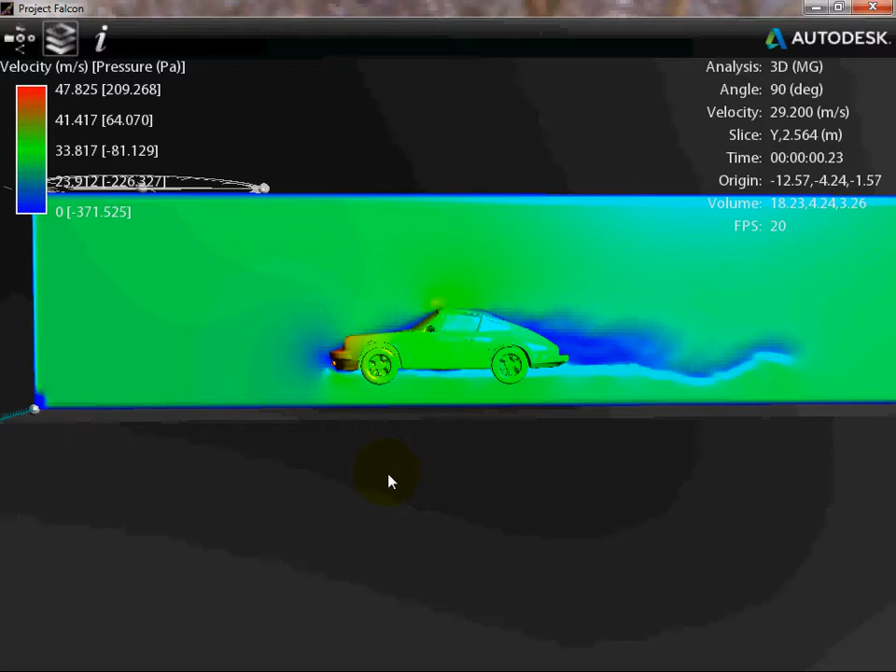And it's fairly simple to use, and you can import models quite simply and quite easily without too much dramas, and use them for wind testing or heat testing, flow analysis. But in our particular case, we're more interested in wind testing. Now what you see here is what the front screen will look like when you open up, and there's a model already placed in the screen, which is a Porsche, an older style Porsche.

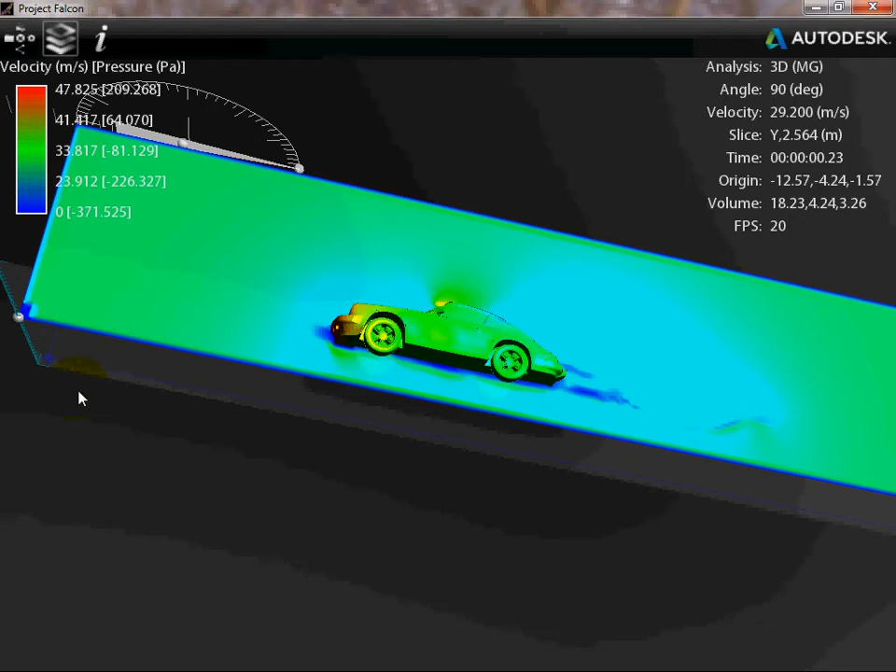Now I've just pressed my left mouse button, I'm holding it down, and I'm moving the viewing plane, as you can see, just by holding my left mouse button cursor. Very similar to what you would do in Creo Parametric, and you can move it to where you want to see. Now you notice there that there's a plane splitting down the center of the car. That plane can be moved and adjusted. It's actually the plane which shows the flow of wind in a two-dimensional sort of a setting over the vehicle.

And you notice how there's colors from red down to dark blue. Up on the top left hand side here, the indications are what that means. You're given two figures up here. The one on the left hand side is the velocity in meters per second, and on the right hand side you're given pressure in pascals. And so you can see the red indicates usually the higher velocity, and the higher pressure go hand in hand. Blue is zero, and in fact the pressure is negative at the zero end.

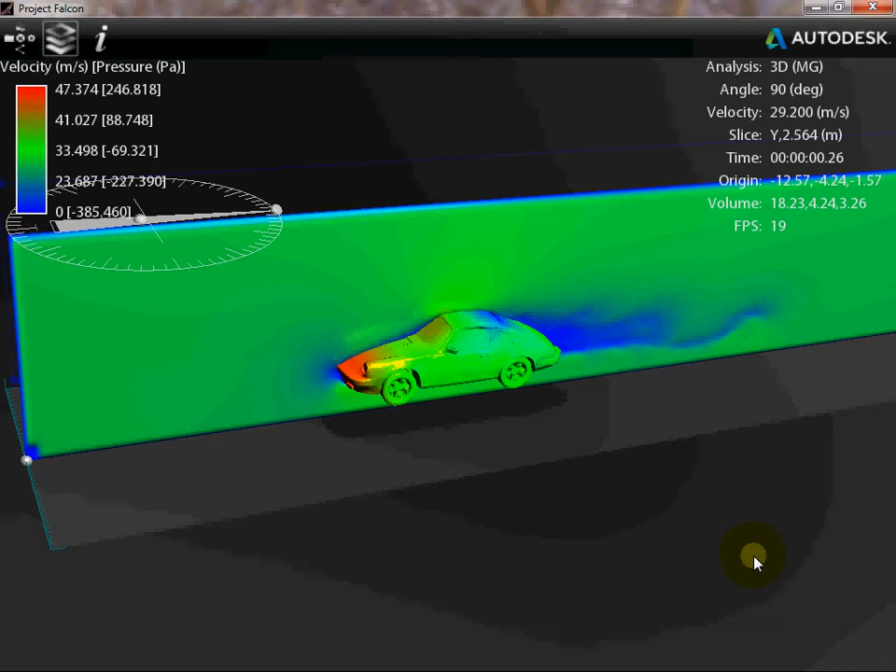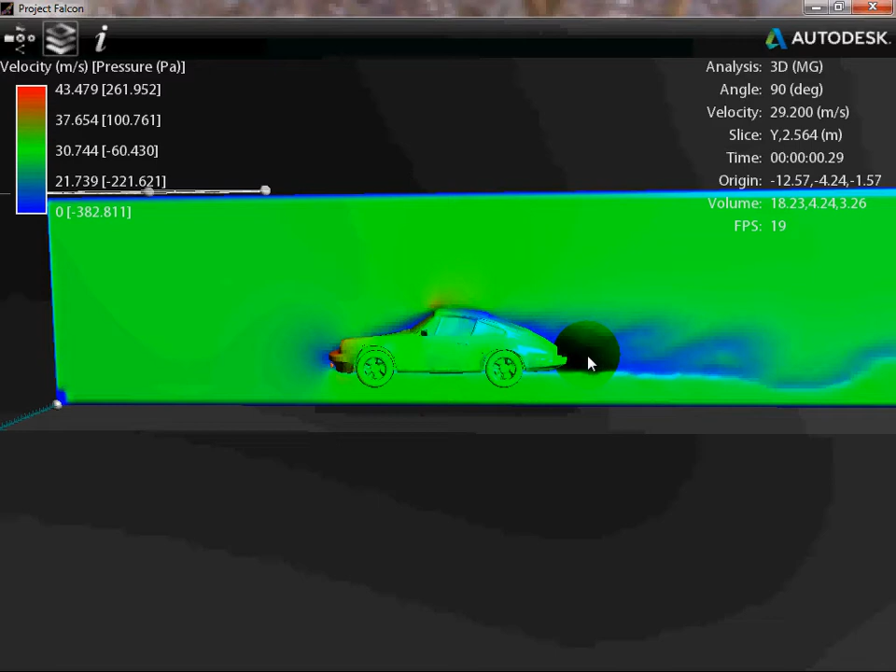Now when we're designing cars, we want to minimize low pressure zones, because those low pressure zones will actually create a vacuum which will suck the car in the opposite direction of the flow. So as a car travels quickly, it'll generate a high pressure resistance to motion at the front, which you'd expect, the wind pressure pushing against the car.

And as it travels quickly, around the back over here, it'll also develop a vacuum which will tend to want to suck the car back into that vacuum place. So it also experiences a drag, it's called, as a result of a low pressure zone which is situated opposite to the direction of motion.

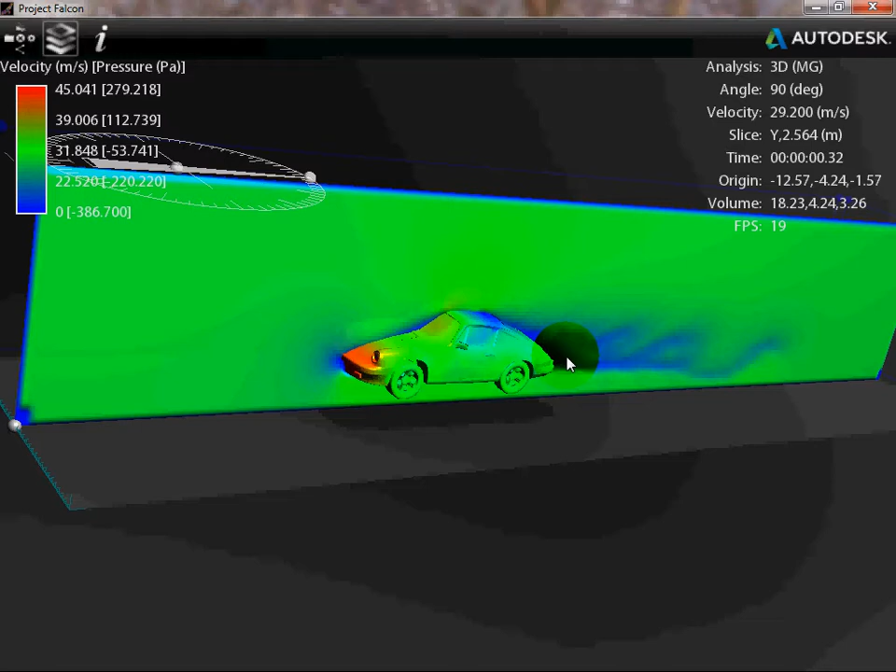Okay, now more about Project Falcon. At the top here you notice there's like a compass sort of a setting. That compass allows you to adjust the wind direction. You can adjust it by clicking on this little arrow and moving it around, so that will give you a different wind direction flow. And you'll see each time you change that, if you've got a slower computer like mine with an i5 processor, you might have to wait a little while.

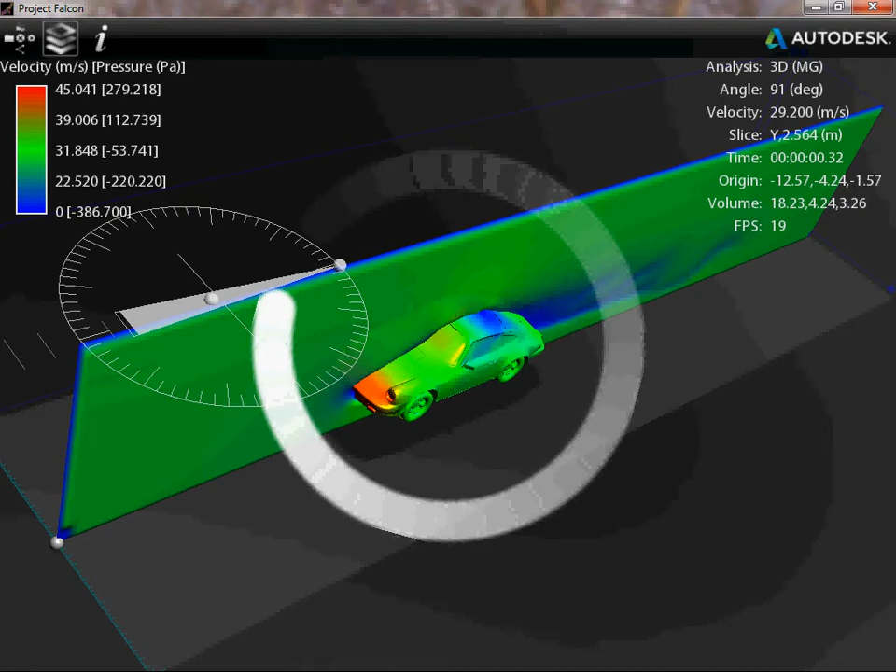So I might pause every now and again so we don't have to watch this while Project Falcon reconfigures itself. So I'll pause here and come back. So it seems like a simple movement. We move the airflow slightly, but you see solving airflow is written down here. Falcon's got to do a lot of recalculating to work out the different patterns of resistance involved in moving the airflow even slightly on the car. Okay, it's completed that now.

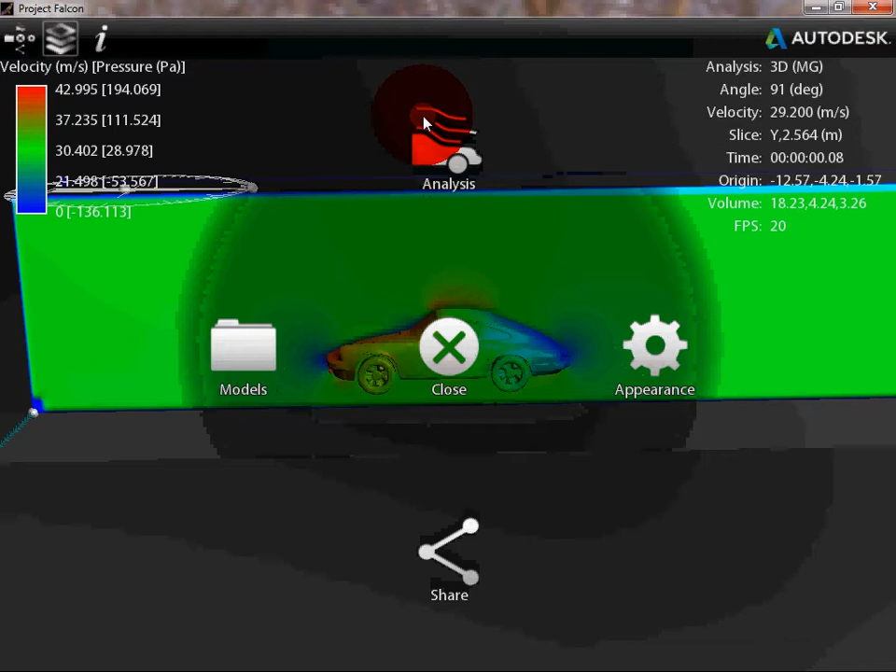Next thing to show you is probably something which is very important for us who want to test our own models, is how to bring in our own model, rather than use one of Project Falcon's. Now, if I hold left click down anywhere on the screen for a couple of seconds, I get this menu circle.

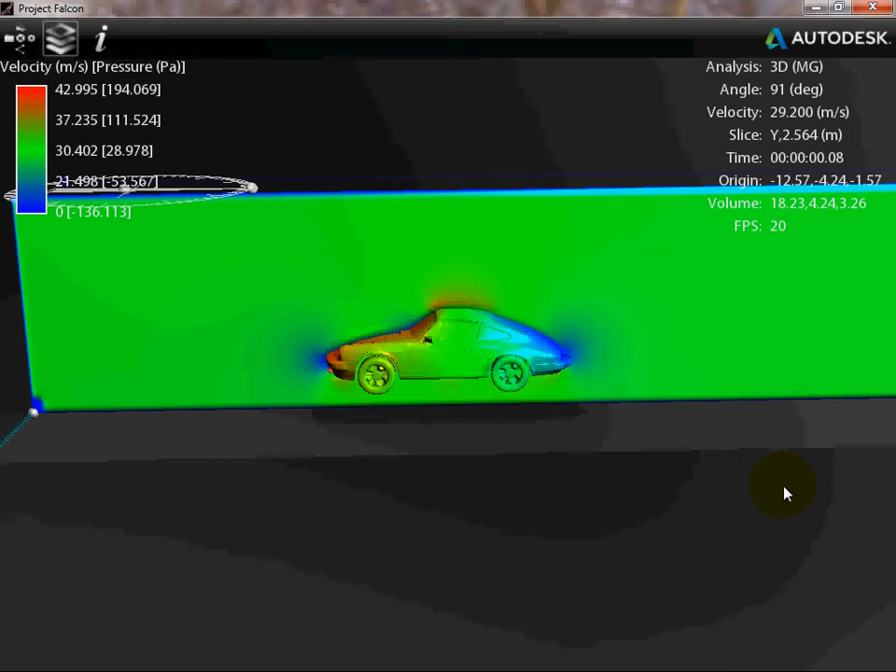And from here, we can go to whatever we want to do. We can change the appearance of the model, and we can change the way it displays airflow. We can change how it shows its results. We'll look at those in a minute, but more importantly, if I hold my left cursor down again, I'm interested in models, and I want to bring in my own model.

I can use some samples that are here. I don't know how to cache models, but let's import a model, which is what I want to do. Now this has gone to where I've been before, onto my desktop, and I have my own model that I want to bring in.

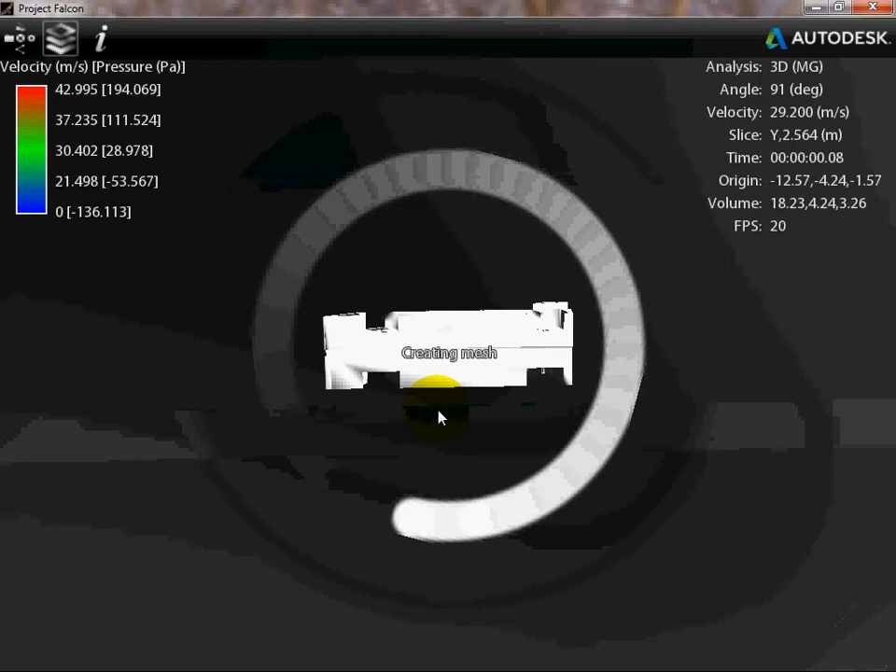So let's try this model over here. Click on it, open it up, and Project Falcon has now brought and imported this model, which came out of Creo Parametric, and it's now going to create a mesh around it, which is a sort of a breaking up of the smooth edges into finite smaller shapes that it can then calculate with.

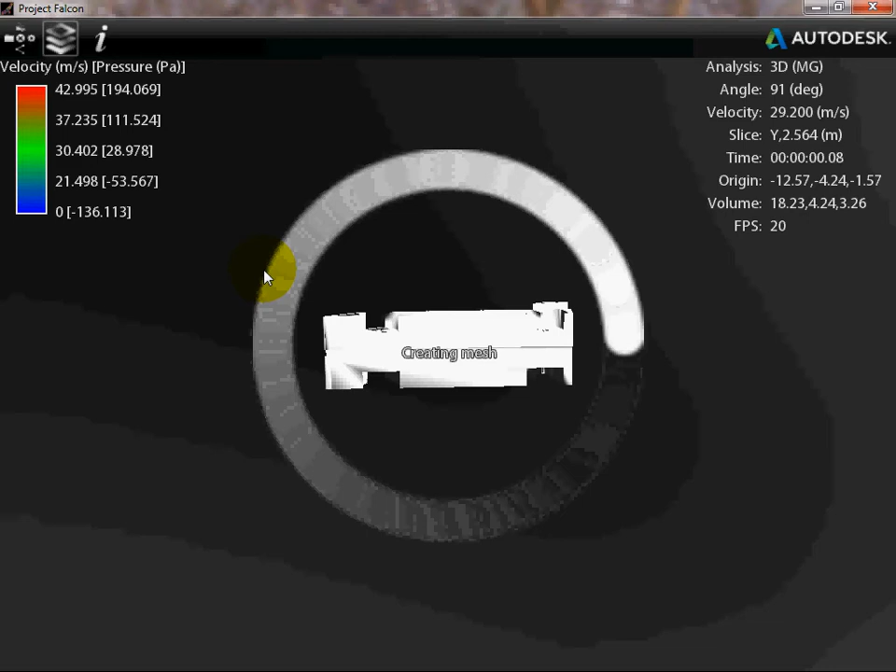So it's almost like putting a fishnet stocking around it: the smooth surfaces are divided up into scales that can be geometric shapes, plane geometry shapes that Falcon can work with. Alright, I'll pause a bit more so we don't have to watch this.

Okay, well there it is. It's taken probably about a minute or so, and our model is now in position, but notice it's sitting on its side, and that's not how we want it to go, because the plane, you can see, is now parallel to the bottom surface of this model that I've created.

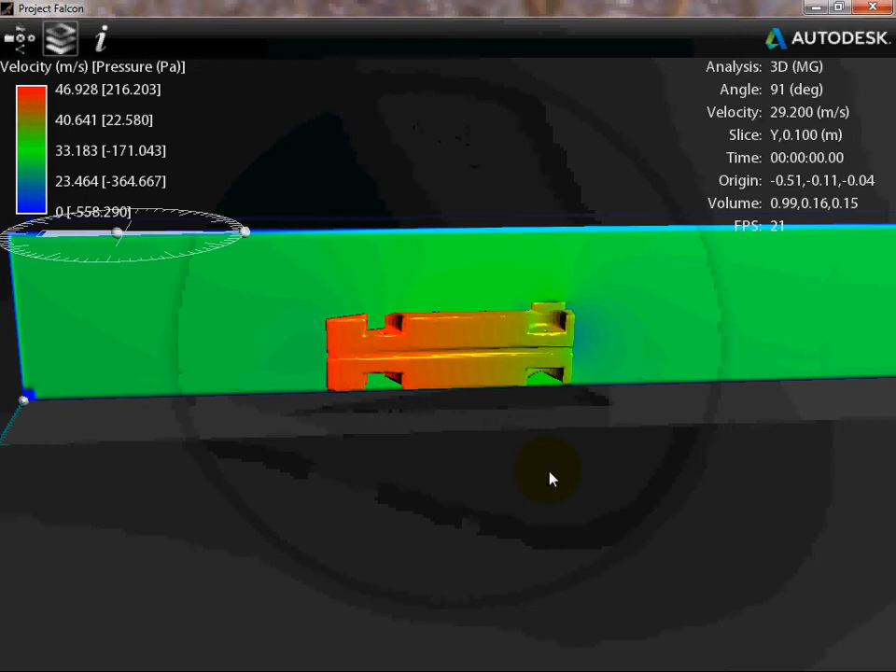So I want to spin my model around, so I'm going to hold the left cursor down and bring up my menu again. There it is. Okay, and I'm going to look at appearance, and let's go to result display. Result display, which we won't move to just yet, gives us a chance to look at how we can display the various different flow lines around the object. That's not what I want.

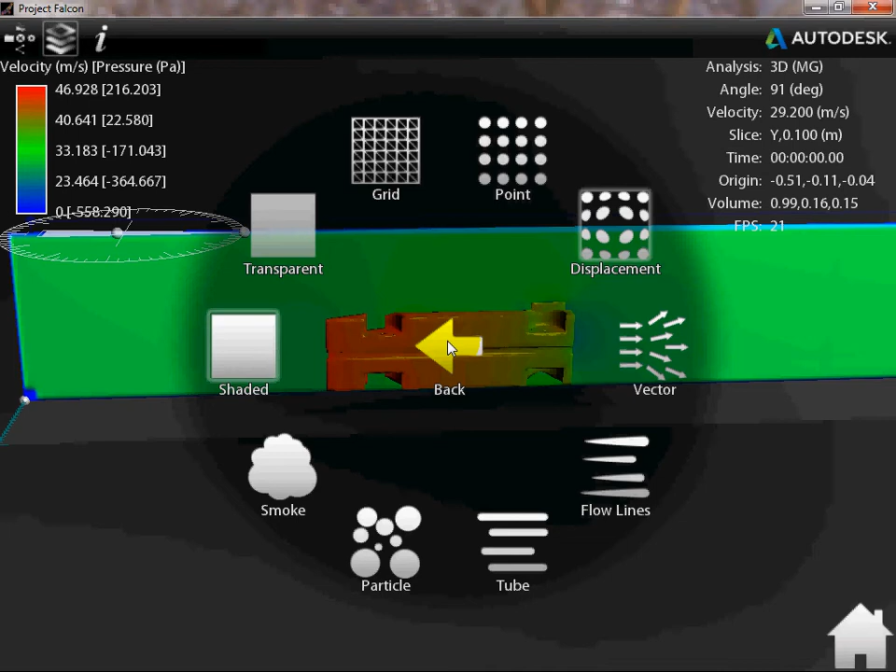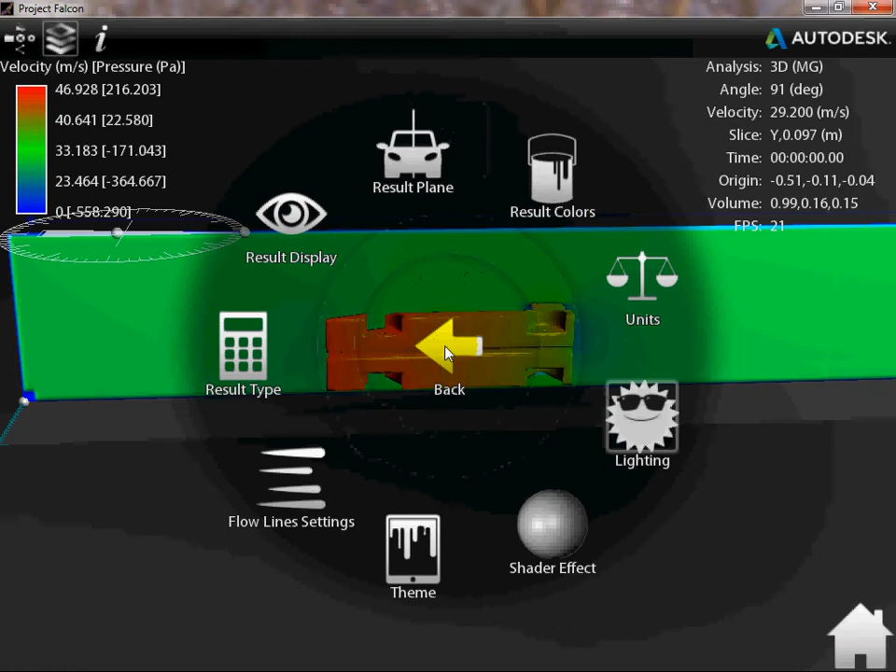Result plane will give me an ability to move the plane up and down if I want on the car. I can flip the plane to the left, the wind plane, or flip it in other directions if I choose, but it's best to have it where it is. It's not exactly what I'm after. So let's go back and we'll move into analysis. Yeah, here it is.

So this section called orientation in analysis is the area that we want. Now I can move my model relative to the plane by clicking on these arrows. If I click it down 90 degrees, it'll move it around. It's not always intuitively obvious which way. You just have to play around with it.

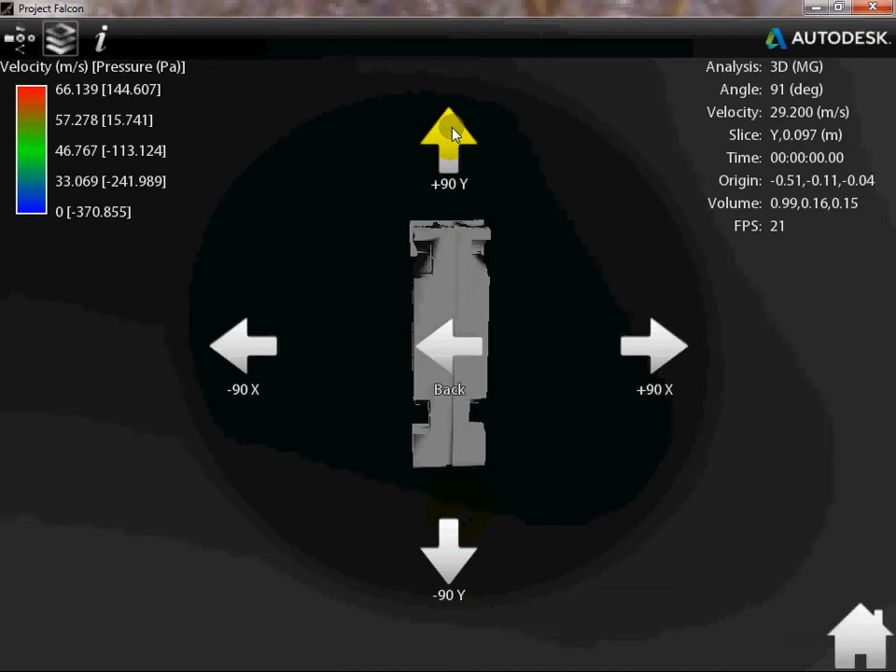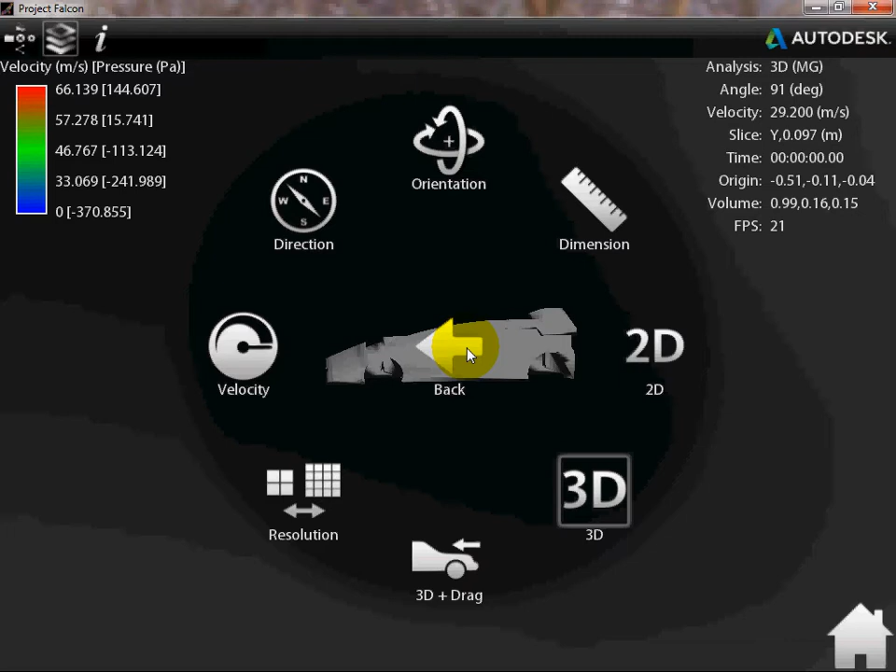Now I can see that my car's in the right orientation now, so I'm going to click back and the car will stay there in that position. If I click back again and close, okay, so the mesh has been created again, and now my car's in the right space.

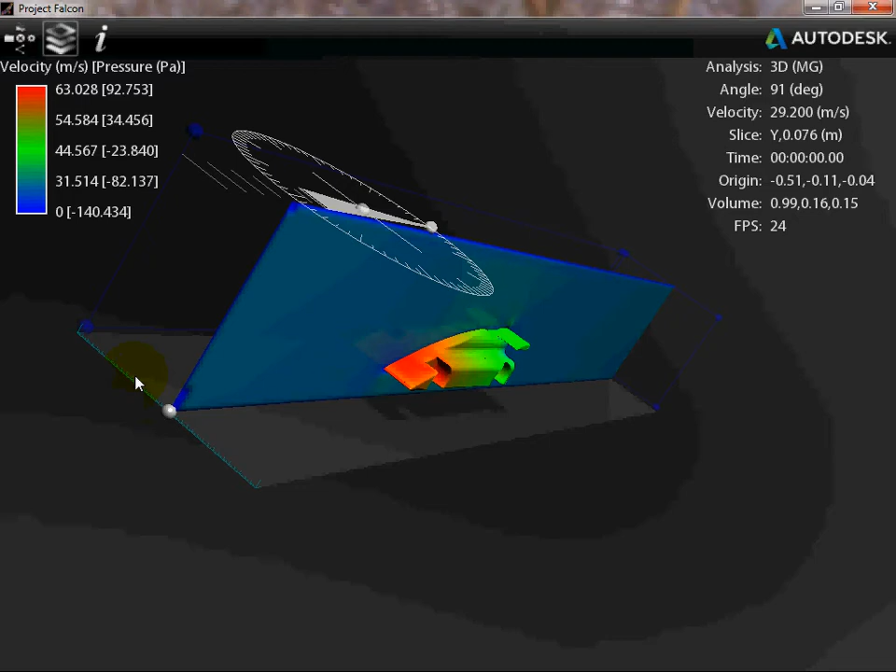Alright, now I mentioned before that we can move the plane in which the wind is being displayed by grabbing this pull handle and moving it backwards and forwards. Now I won't do that because we'll go back into recalculate. What is worthwhile showing you is that we can also grab these grab handles at the back where I'm indicating here, and we can adjust the size of the wind tunnel that the car's sitting in,

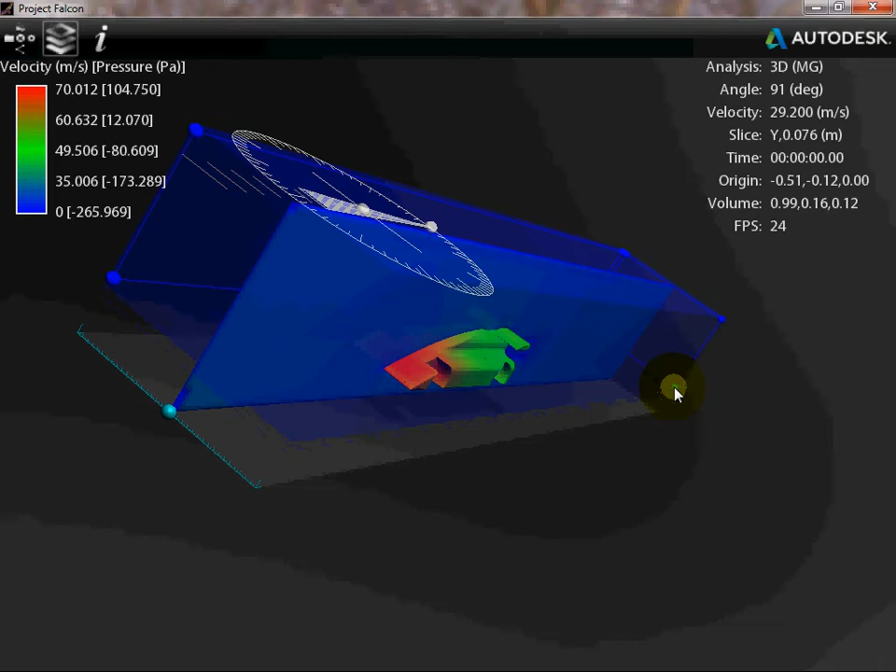and that's pretty important when the time comes and we want to be able to create a road surface that's just below our wheels. Now I don't have wheels fitted to this model, but you will when you do it. Okay, so we can play around with those and move the wind tunnel to make it the right size.

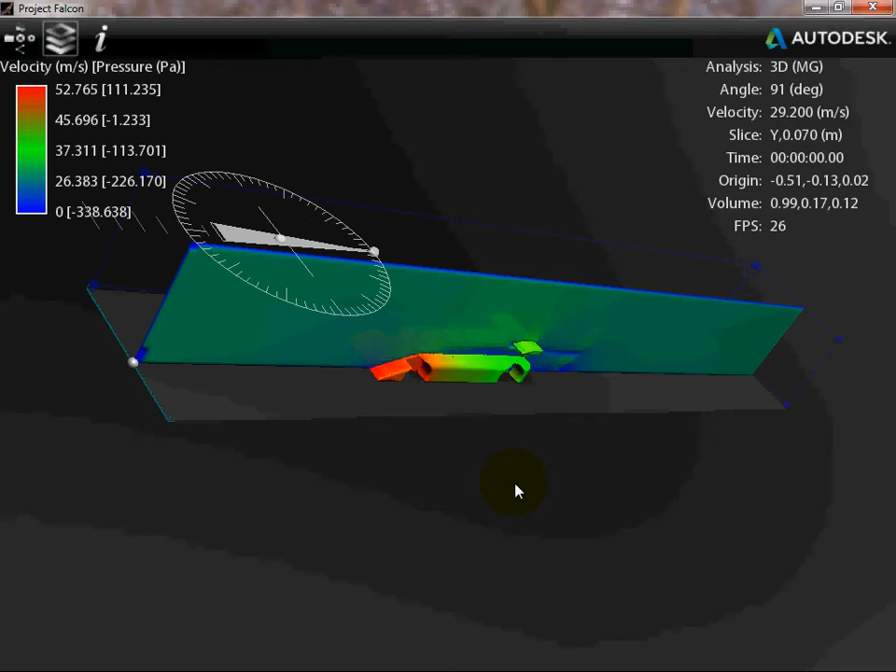Now notice here that you can see the pattern of drag on this car is a bit different. So we've got a high pressure zone at the front, some blue sections at the back, and around the side here low pressure zones. Alright, now the next thing, I'm going to left click again here to bring up my menu, is to look at creating under analysis a 3D wind flow.

So rather than the wind just coming in that plane that just slices through the car, I want to create a 3D plane surface, or 3D and drag, which is down here. Now I can adjust the speed of the wind by left clicking on that icon and dragging it around. Notice how it's got some settings like car or person or rocket.

Well, a car, they say average 26 or so meters per second. That works out to be around 100 kilometers an hour. Aeroplane, if I go down to here, you'll see it's around about 216 meters per second. Rockets up about 500. So we're going to just stick around car because we've got a car. At the moment I've got it set on about 40 meters per second, so maybe 130, 140 kilometers an hour, thereabouts.

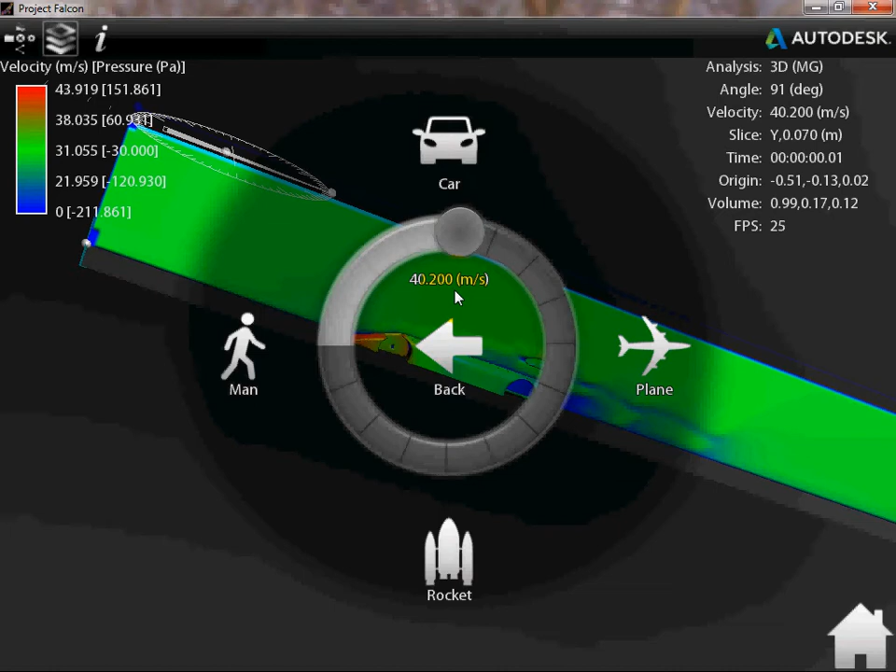So I'll go back. We're happy with that. And I want to try 3D and drag. Now 3D and drag, when I click on this display, it's going to give me this graph.

And the graph will display several different bits of information. So looking down the bottom of the axis, you have the time figure, and at the top of the axis you have several different labels, color-coded usually. So the blue would be average, and it says CD, coefficient of drag, and there's a factor there. I think it's 0.5.

Notice that these other measurements are measured in newtons, so they're forces. So that would be drag force, I assume, and this one I'm guessing would be lift force. And we've got our coefficient of drag here at 0.43.

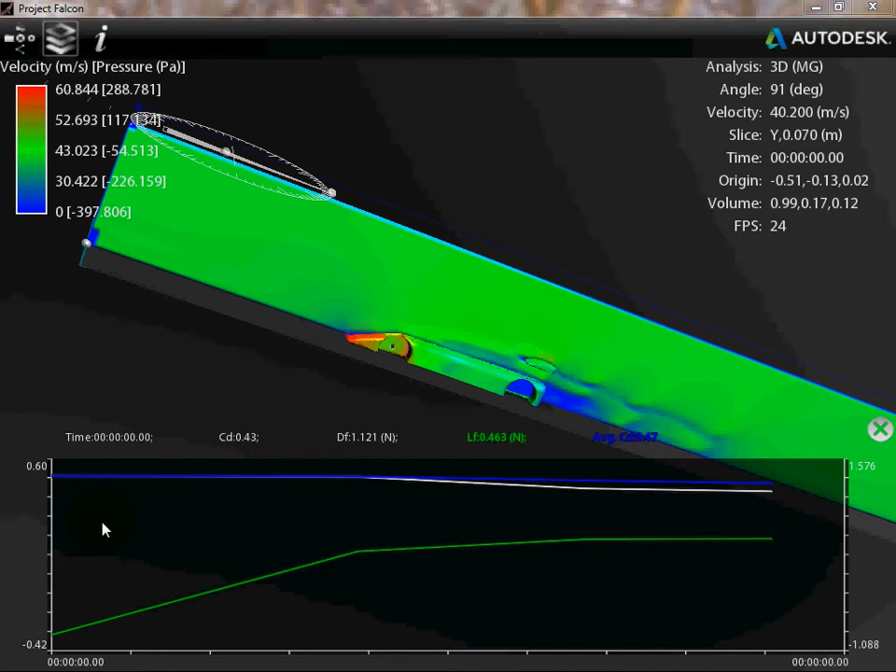Now, as you watch this over time, these lines will change, because I think what happens is Falcon kicks it off, starts it up, and then as information and data rolls in, as it analyzes the results that flow over the model, then these lines will start to converge, and eventually over some time you'll end up with the three lines being very close together at a certain coefficient. And that's about all I can tell you for that at the moment.

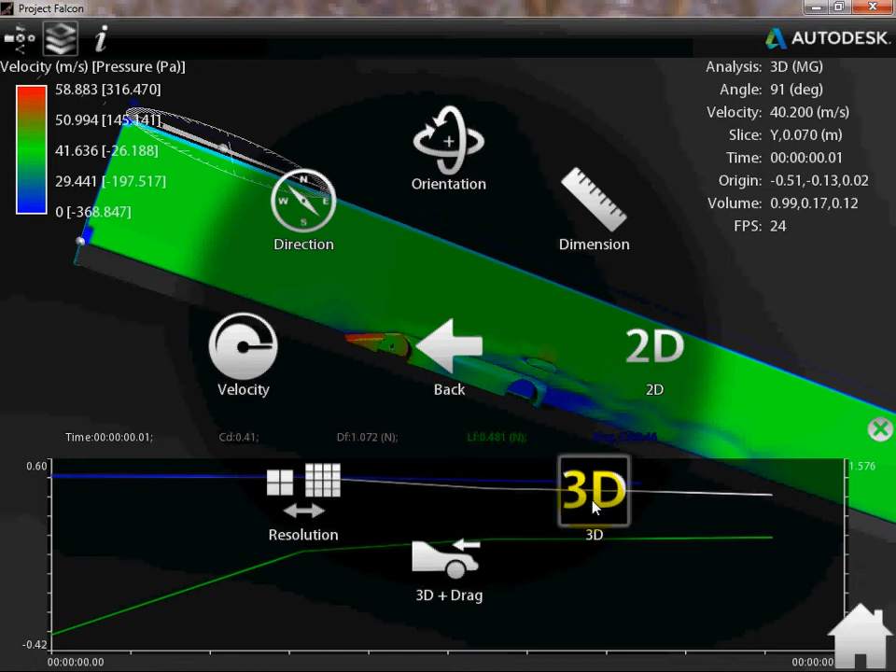Okay, now looking at our car here, let's see if we can get some wind blowing over it in a three-dimensional sense. So if I hold my left cursor down here now and I look at analysis and I click 3D, may try that one more time, and yeah, okay.

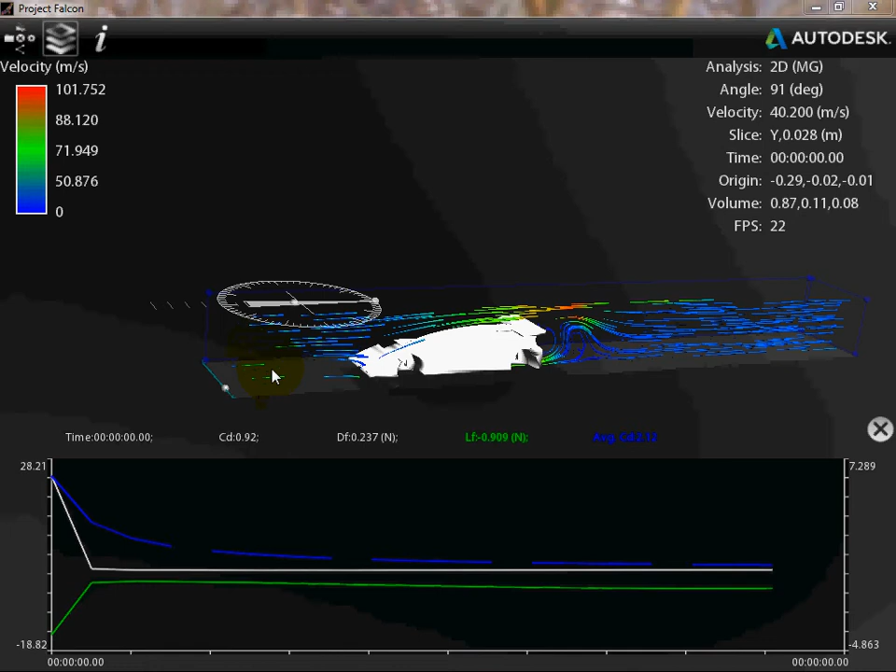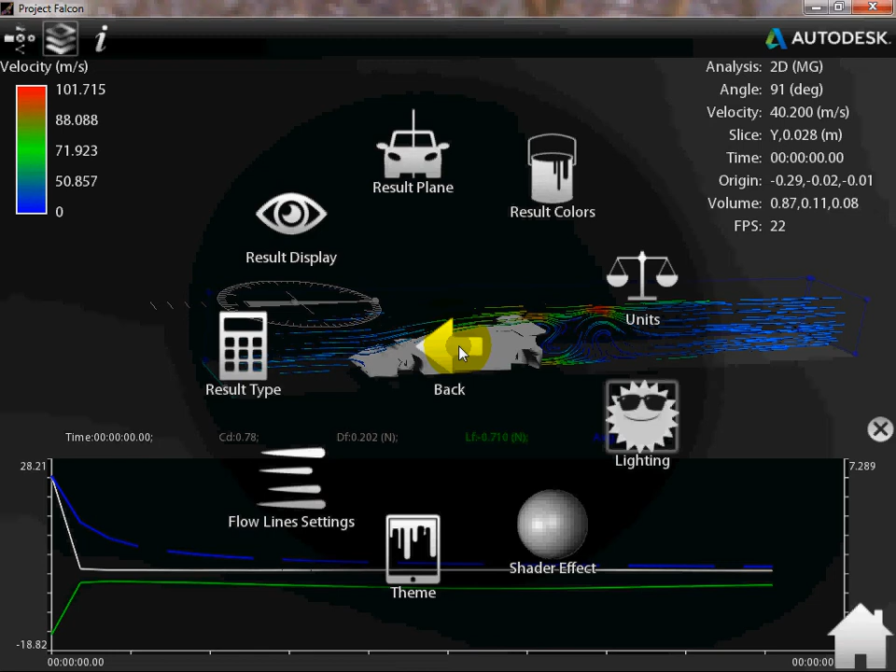What you're looking at now is a 3D version of the wind flow. So the central plane with the wind travelling on it has disappeared, and now it's been replaced with a 3D wind flow. So that happened through looking at analysis, and it's actually choosing 2D at the moment, showing 2D. 3D should provide us with a good bunch of wind flow that we can see. Yeah, so you can see a 3D shape now with airflow flowing over the car.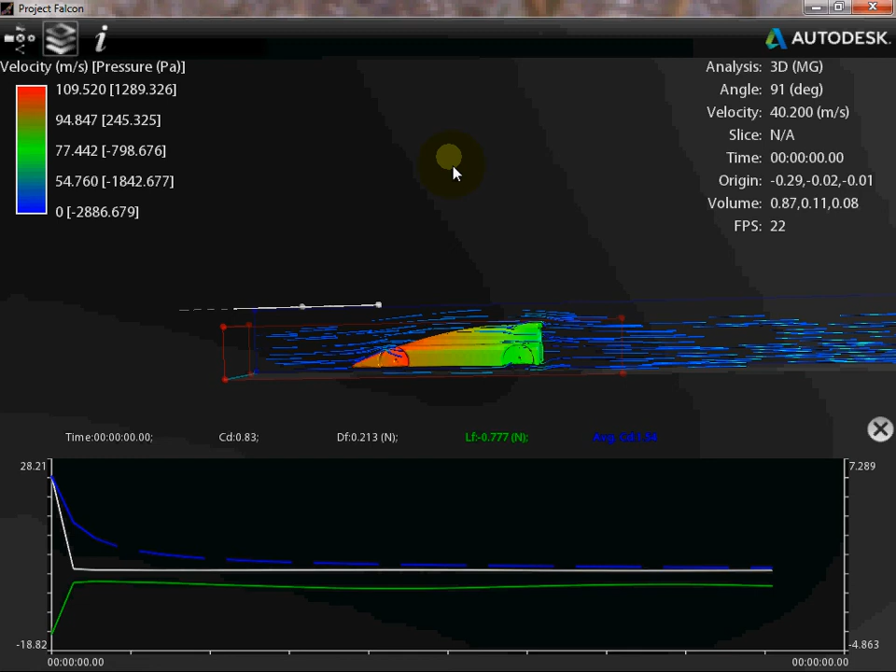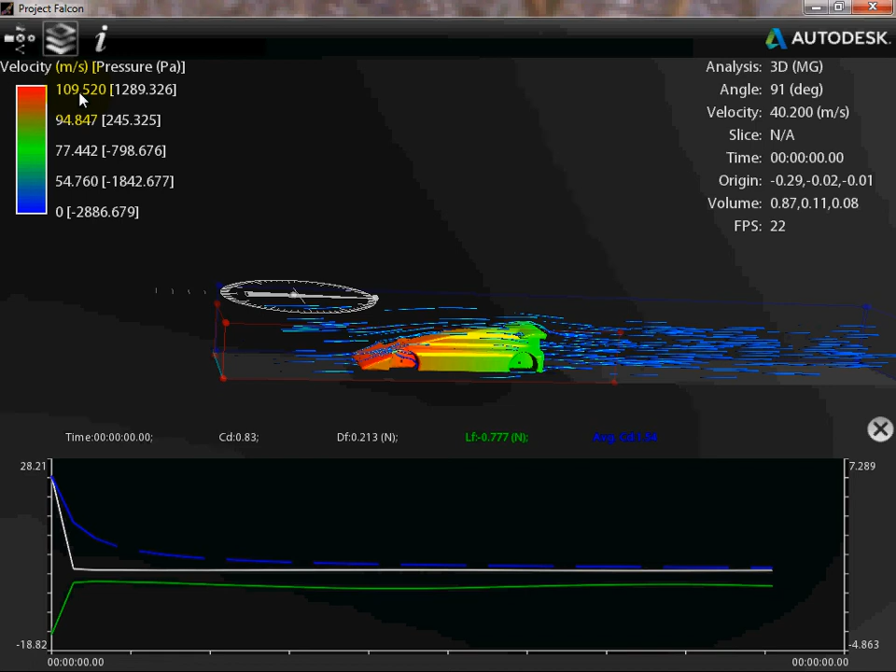Also, interestingly enough, is to watch the high pressure zones. Notice the red is the higher pressure area. Quite high pressures now. The velocity is 109.520 meters per second. So if we worked out that times 60 times 60, and we divided that by 1,000 meters per kilometer, it's traveling at almost 400 kilometers an hour. So it'd have to be a Bugatti Veyron or something like that to produce that type of speed. But that's what the wind flow would look like at that speed.

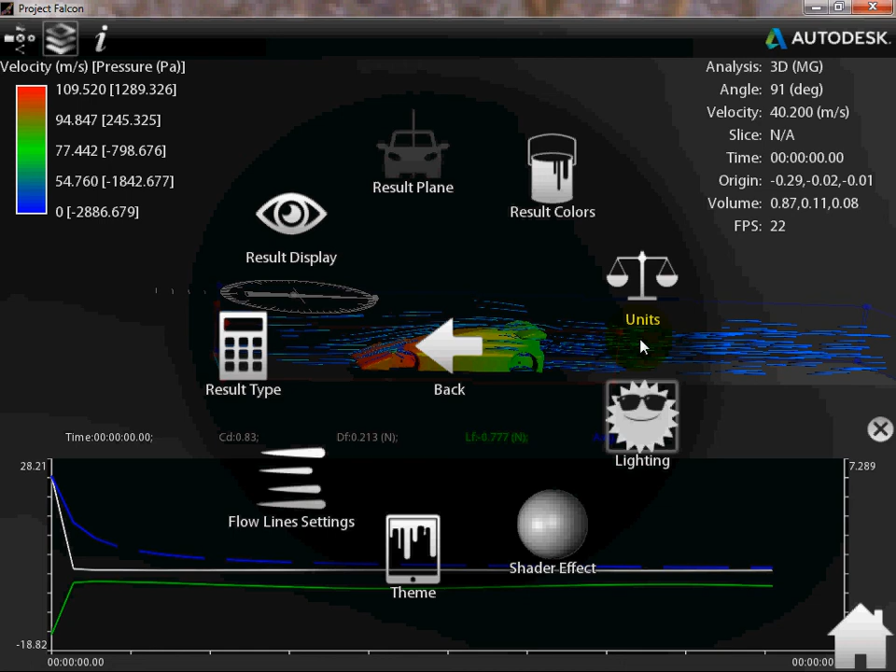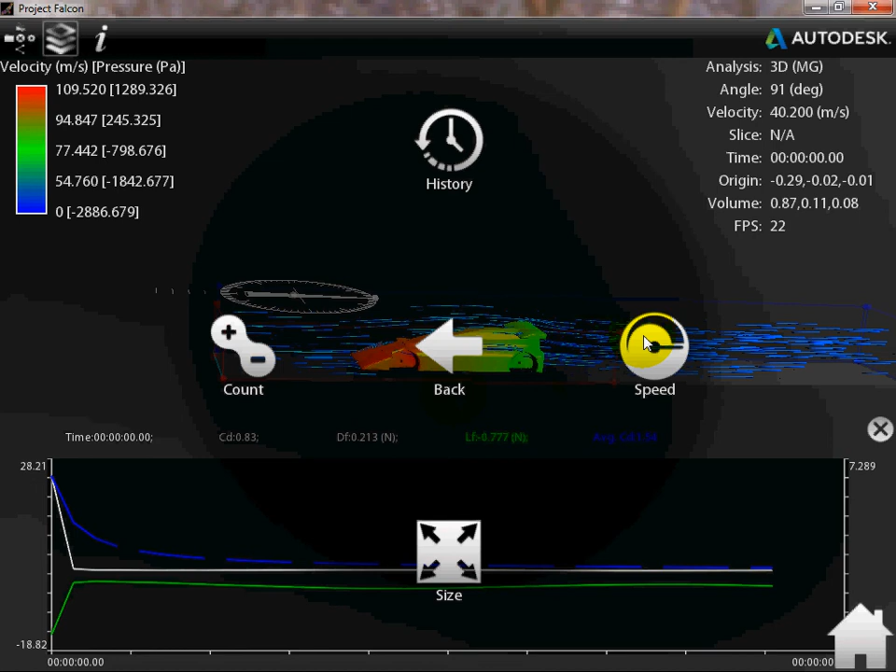Now I've chosen to display that with tubes. You could choose to change the way that looks. So see down here in flow line settings, if you click on flow line settings, you can change the speed at which your flow lines appear. At the moment they're going quite fast. I can slow the flow lines down if I want to by dragging that down.

You can change the size of the flow lines. I'm using tubes, so the size is 150. I can make them thinner so they appear to go thinner, as you can see, or make them thicker and fatter so that they appear to be fatter, and I can see more of an indication. So you can change and play with those dimensions.

You can also change how many of them there are. So do I want just a few passing by, or do I speed them up and create a whole lot of them? So you can adjust and play around with those to suit yourself, so you can get the clearest understanding of what's happening to the airflow around your model. Looks pretty good. It's quite a lot of fun to get that.

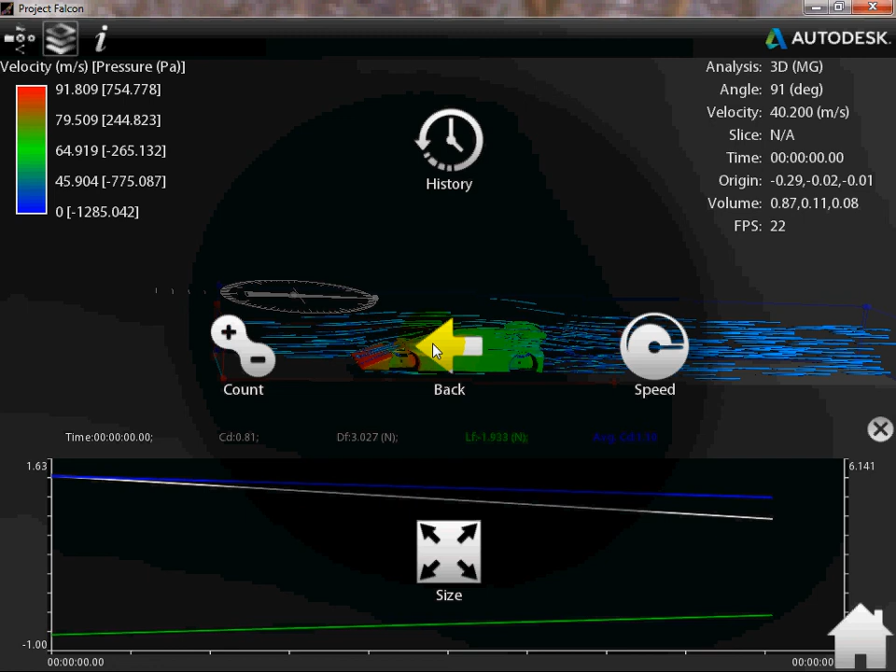Sometimes I've had difficulty going from 2D to 3D, and it needs a bit of patience and a bit of playing around, and I suspect that's because my processor on my computer is not all that quick for this level of taxing service it has to do.

Okay, probably one other thing to go to look at would be in analysis. We've looked at orientation, which flips all around in different directions. You can also look at resolution, and you can change the resolution. I've got it at 109%. You can drop that resolution down and your processor may perform a bit better. It does sacrifice appearance a little bit.

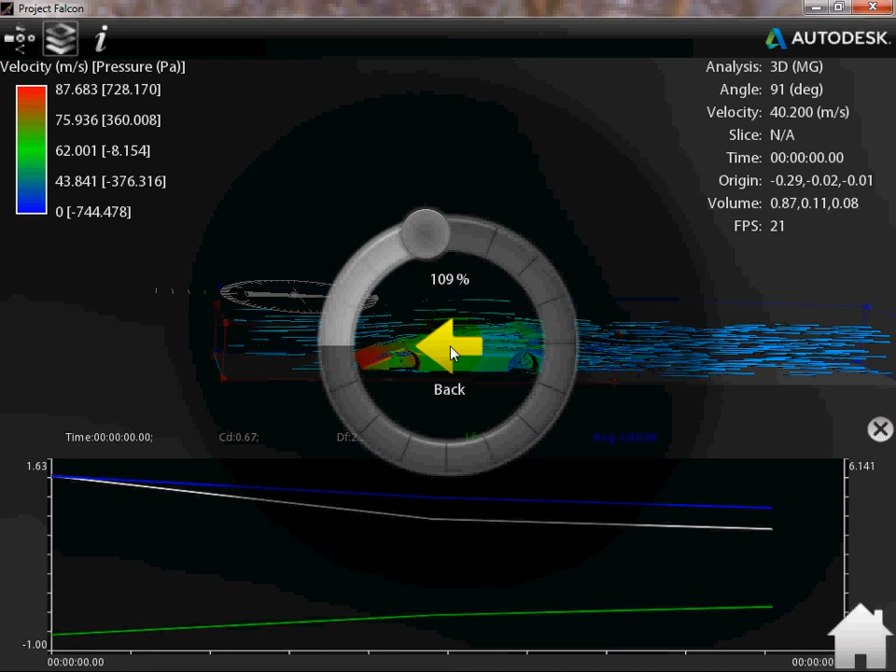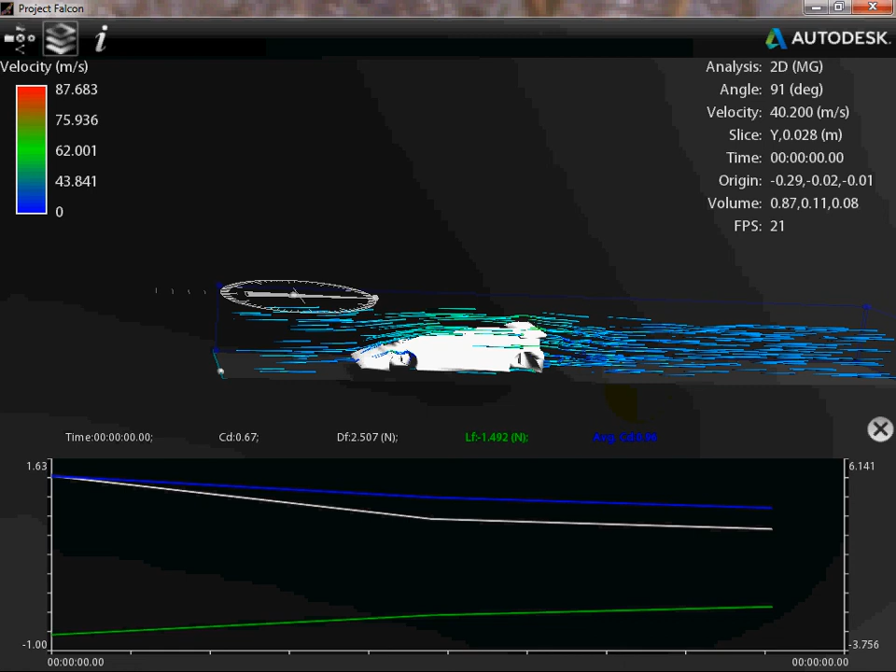Okay, so we're going to change it back to, let's try 3D and drag. It hasn't shown me much difference. Alright, let's drop it back to 2D and see what happens then. Okay, so with the 2D setting, you can see that it's now produced that movement on a single flat plane. So that's rather interesting.

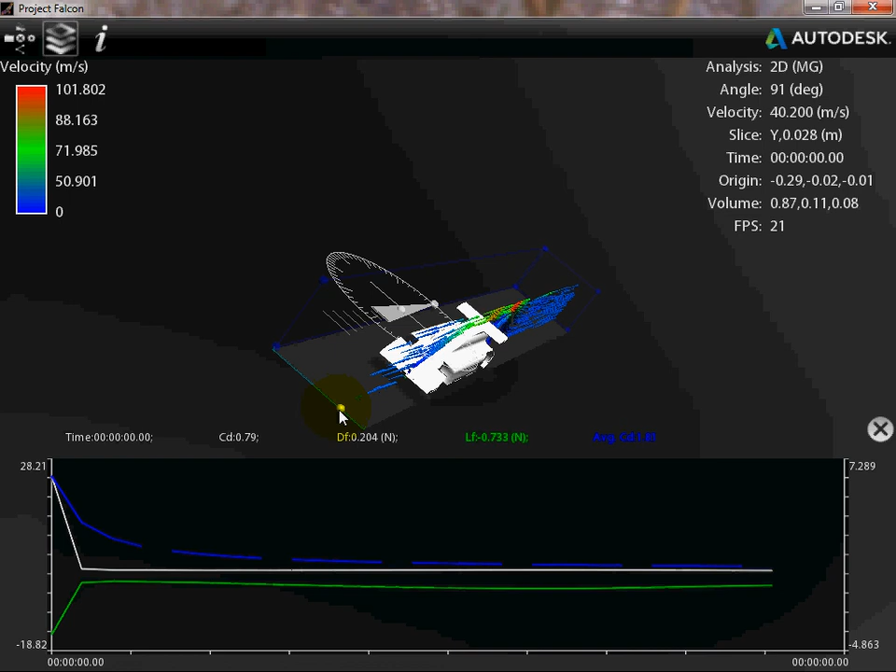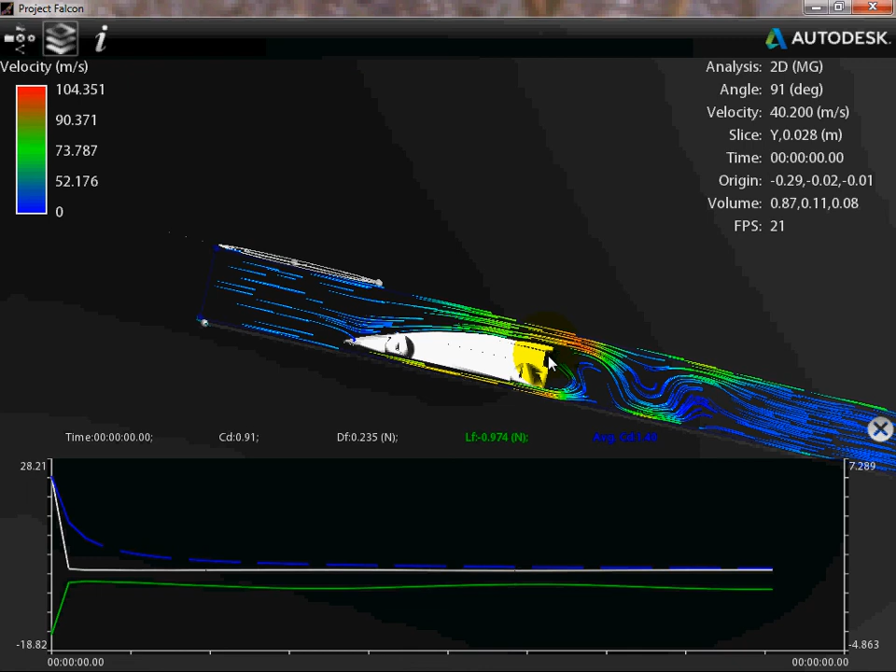So that plane could be moved using the drag bar from side to side. I won't do that because it'll take a while to recalculate, but you can get a good indication of the turbulence that happens behind the model there, and that turbulence would create drag, which would slow the car down. Whereas at the front here, you notice it's fairly smooth. So my car design would benefit from dropping the back of this car down to let the air flow over it smoothly, rather than that sudden drop right from the top, creating all that turbulence behind the car.

Alright, that's a brief introduction to Project Falcon. It has a lot of potential. Just before we depart, look at the graph down here now. It's been running for a while and it's leveled out, and you can see the average coefficient of drag is 1.27, which is quite high, and I suspect it's because of the back tail, that sudden drop down here. That's what's causing it. So I should be able to alter my design of my car, bring it in again, and see if I can drop this coefficient of drag and watch the air flow smoothly over the car for efficiency's sake. Okay, see you later on.